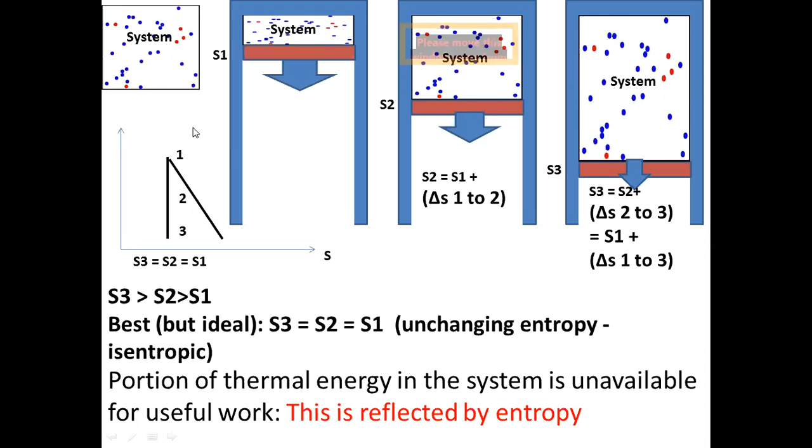That is more natural, yeah, that is more natural. And I'm going to continue this with one example, because with an example we can understand this better.

Also, before going for the example, let's look into this kind of thing, let's say work isentropic, and when you have work actual - work isentropic is more because you are not generating or increasing the level of entropy. So W isentropic is ideal, so it delivers work. Here, that ideal work is more than the actual work.

That's why, when you take the ratio of W isentropic to W actual, or W actual to W isentropic - if you take the ratio, we call this isentropic efficiency.

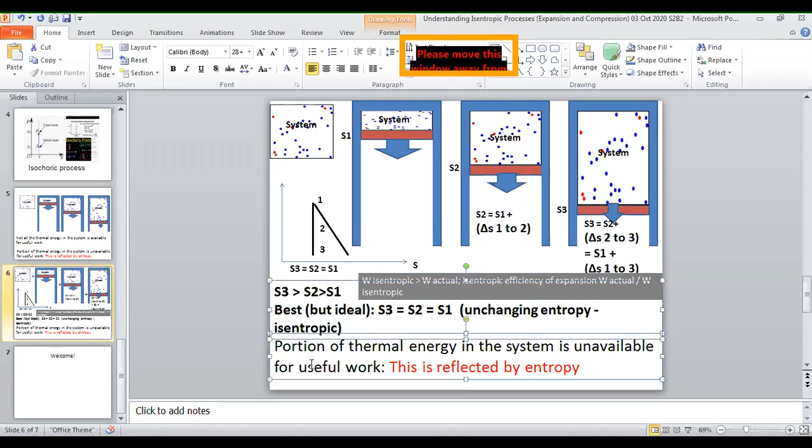A similar one we can take for compression. That is isentropic compression - imagine air compression or refrigerant compression. So for compression, in actual you need more compression work, and in ideal isentropic you need less compression work. This is common sense, yeah.

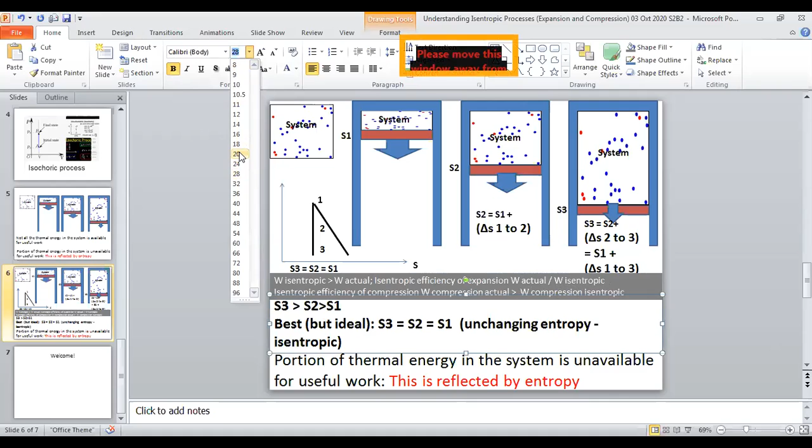So W compression actual is more than W compression isentropic. That's why, again for compression, we have an isentropic efficiency expression - isentropic efficiency of compression, where in this case W actual is... let me take W isentropic first.

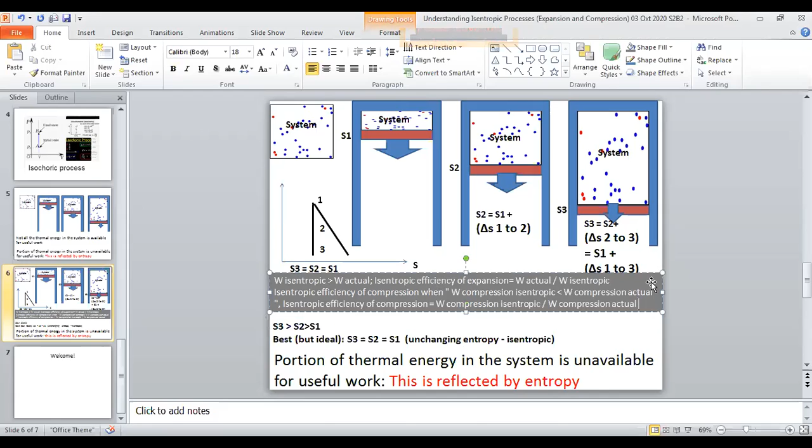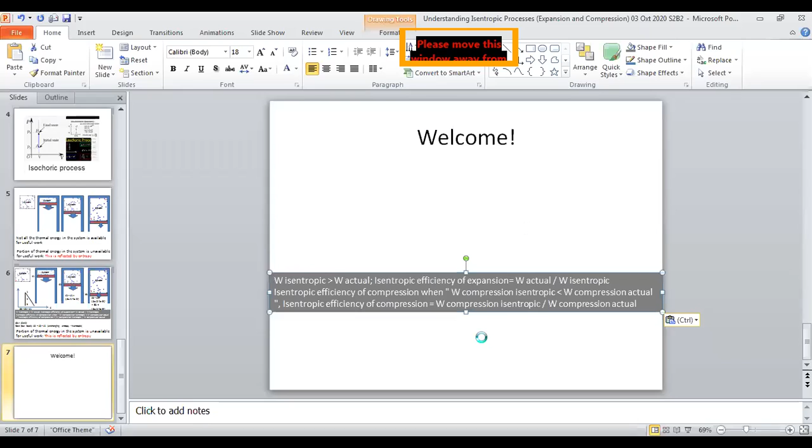So this one, I will take this way. Later I'm going to email you this, that's why. So this is about compression.

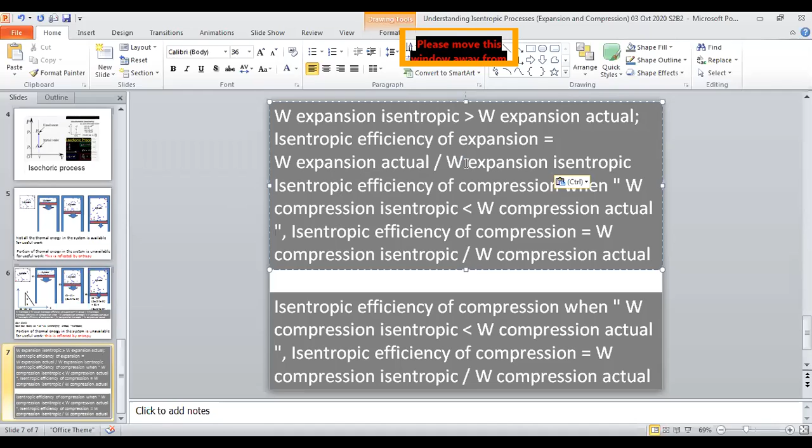Interesting. So W expansion isentropic. Expansion means work done—even in the engine, the gas expands and work is done. So W expansion isentropic, that is really the work delivered by the system, is greater than W expansion actual. So isentropic efficiency of expansion is this W expansion actual divided by W expansion isentropic. So the best is isentropic expansion compared to actual expansion.

Okay, good. So for these things we need some common sense. So you know what isentropic efficiency means: for expansion it means work done, work done by the system. So compression means work done on the system.

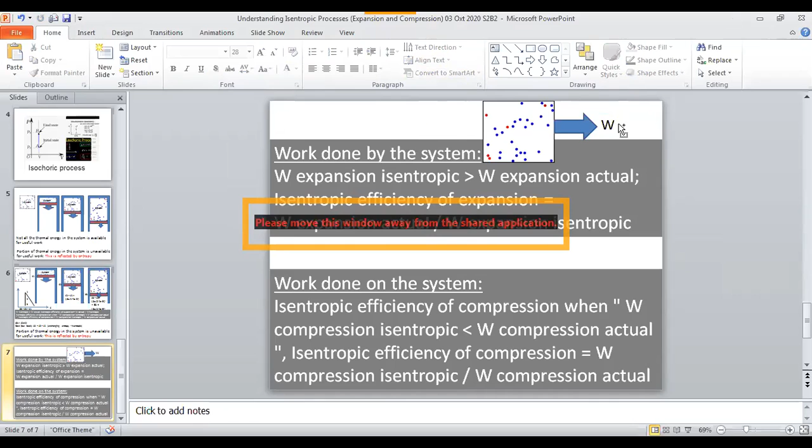Again, let me know if you are not hearing. So this is W. In the compression mode, it's the other way—work done, W, on the system.

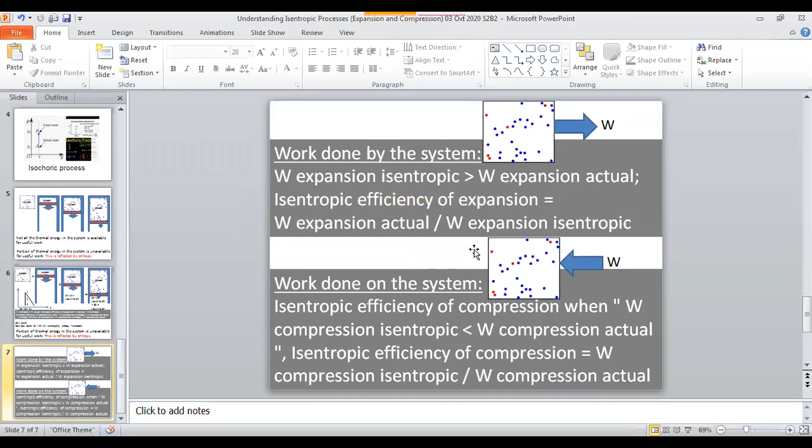Interesting. Yes. So when there is work done by the system, there should be expansion. Work done on the system, compression means part of the system boundary is moving inward and the gas gets compressed. In expansion, the system boundary moves outward because the gas expands, and work is done from the system or by the system. That's how it is, and this work is what we call mechanical work done because of this expansion and compression.

Quite interesting. So you know isentropic efficiency for compression and isentropic efficiency for expansion. You have some basic idea of what isentropic means—it means you are not letting the unavailable portion of thermal energy for useful work increase. So not letting it increase means you are getting the best work done out of the system. That's why it's an ideal case. So you always compare it to the real case.

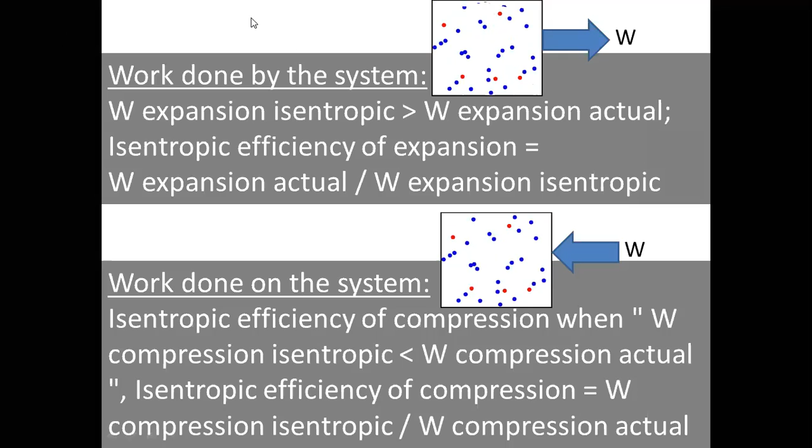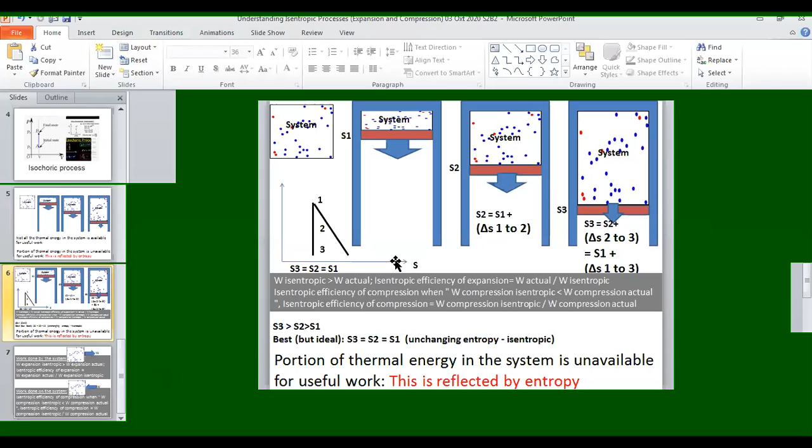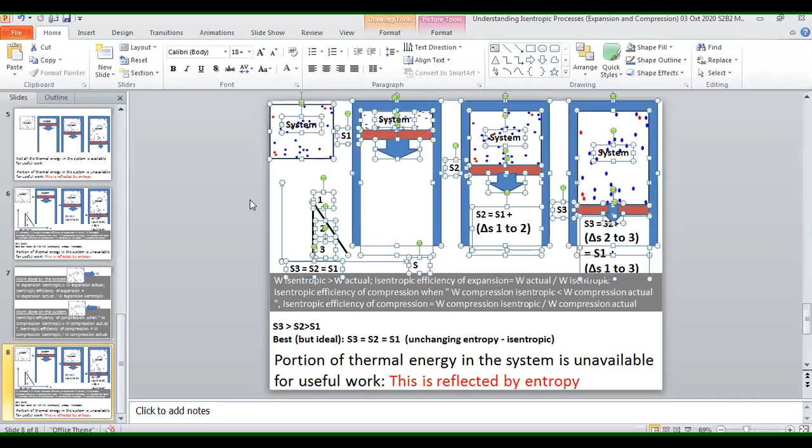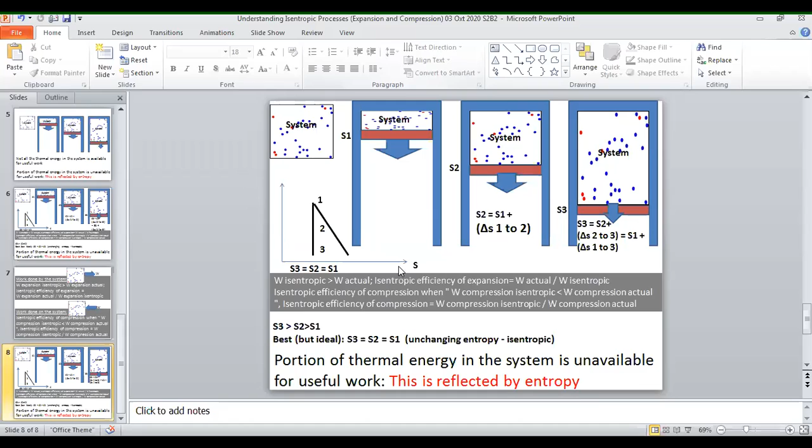Okay good. Then I have to bring the previous slide back. See what I'm going to do—I want to maintain this as a photographic memory for you.

Yes, it is here. But don't expect animations anymore. Yes, this one. So...

I'm writing an expression for efficiency, eta isentropic, work done—eta isen, let's say expansion. So when expansion is there, of course you have 1, 2, and 3 here. But now in actual, 2 is here. Ideally, you have 2 here. In actual, your 3 is here, and ideally, you have 3 here. I hope you can understand this.

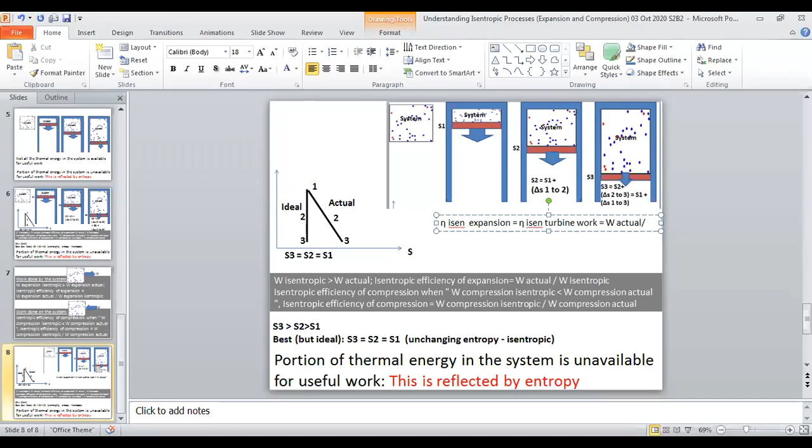Okay, let's say this is isentropic expansion. Let's say this is expansion—let's say this is turbine work. When it comes to turbine work, W actual divided by W isentropic.

That is equal to—for the turbines I will explain later—this is H1 minus H2 actual, divided by H1 minus H2 ideal.

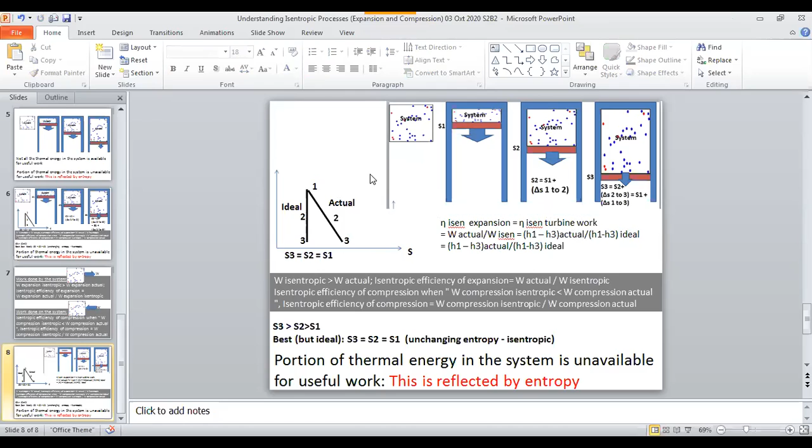So I will rewrite it again. How do I rewrite this? Sorry, H1 minus H3—this is the final, it's 3, not 2. But H1 minus H2 is also okay when it comes to the ratio. H1 minus H3, H1 minus H3 ideal.

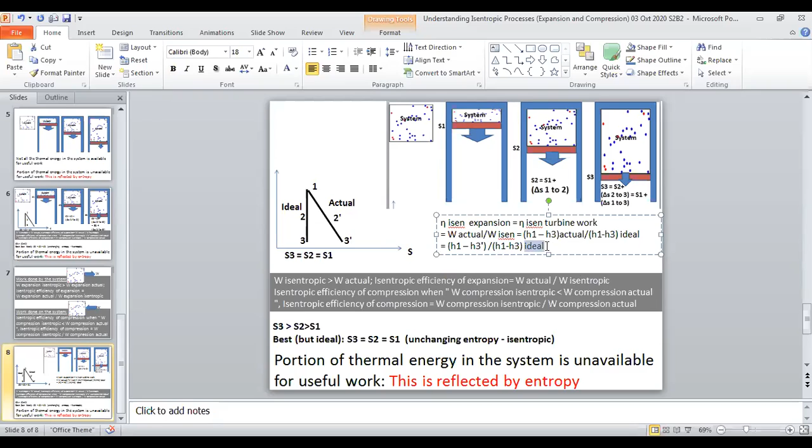So instead of 2, I put 2 dash, I put 3 dash. So this is H1 minus H3 dash actual, divided by H1 minus H3 ideal. So now for actual, you don't need the word actual, and here you don't need the word ideal. Some nice expressions for turbines. Interesting.

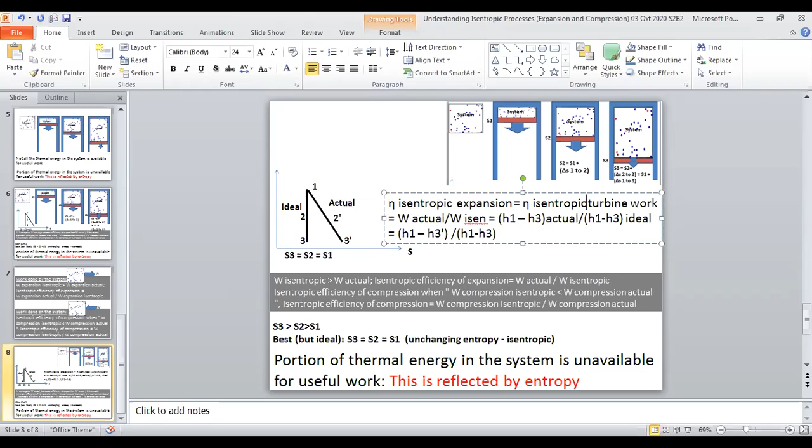Good. Okay, let's say this is isentropic. So why not I complete it as isentropic? Isentropic. Okay, very good.

Same way, when it comes to compression, okay, when it comes to compression, so I take a duplicate of this, I take this out. Compression. Isentropic compression. So this should be compressor work. Okay, compressor work. Actually, isentropic work on compression. Work on compression.

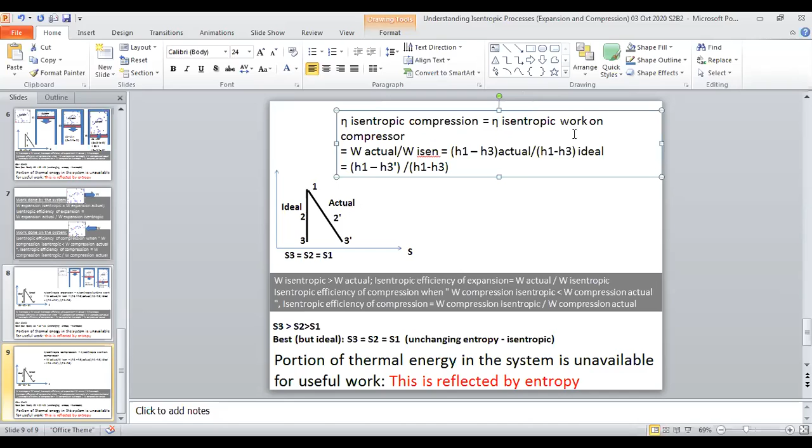Interesting. So that is, so actually smooth. Isentropic is less. That is based on our practical sense or the thermodynamic sense of knowledge. So H1 minus H3 ideal is here. Ideal means isentropic. H1 minus H3 actual is here. So H1 minus H3 divided by H1 minus H3 dash.

Quite interesting. Okay, and if I need to draw a compressor here, I can draw it. Yeah, okay. Gas flow comes, reduces and goes out. So your input, in, okay, in, output, you can put it here, out.

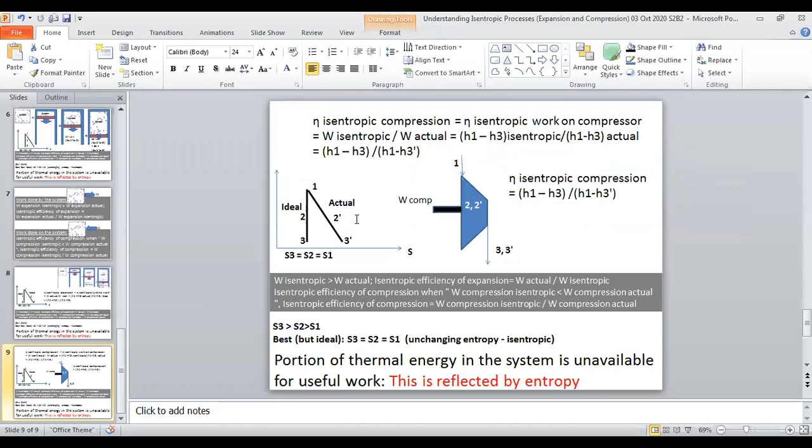Compression. W compression. Quite interesting. Okay, quite interesting. So this is for compression. Really neat. Simplified one. You can have it here. I believe you can understand this. Okay. This is for compression. Okay, good.

Sorry, that can be done. So that's how it is. So you have basically isentropic efficiency now. And this H values, how these H values are possible here, we are going to discuss afterward. Yeah, we are going to discuss afterward. These are the open systems, open thermodynamic systems. That one we are going to address later. So let's say I'm going to put a question for you, a question for you to understand this.

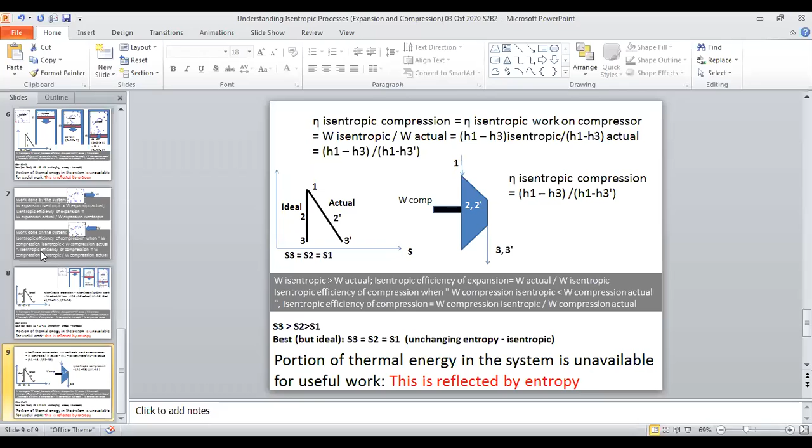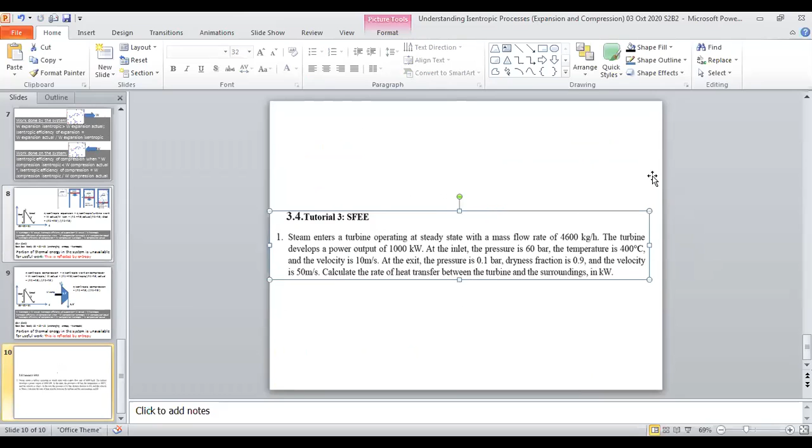This is the 3.4 tutorial 3 about steady flow energy equation. This is the question. Okay, this is the question. So we have to, I'm going to modify this. Okay, I'm going to modify this before we are working on this. Yeah, let me do the modified one. Right? Let me do the modified one.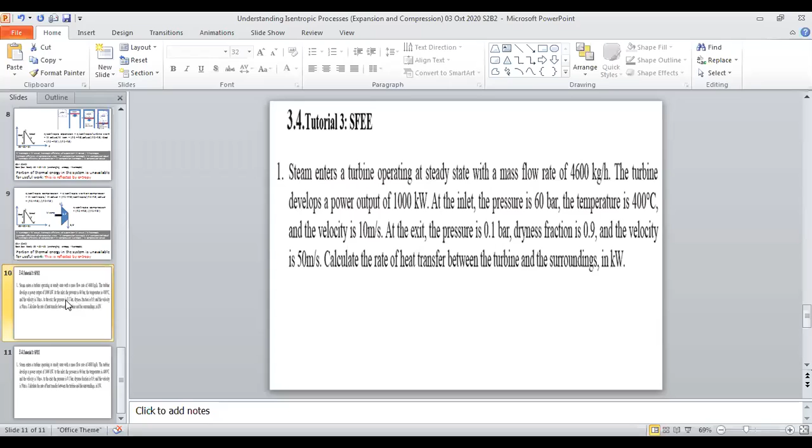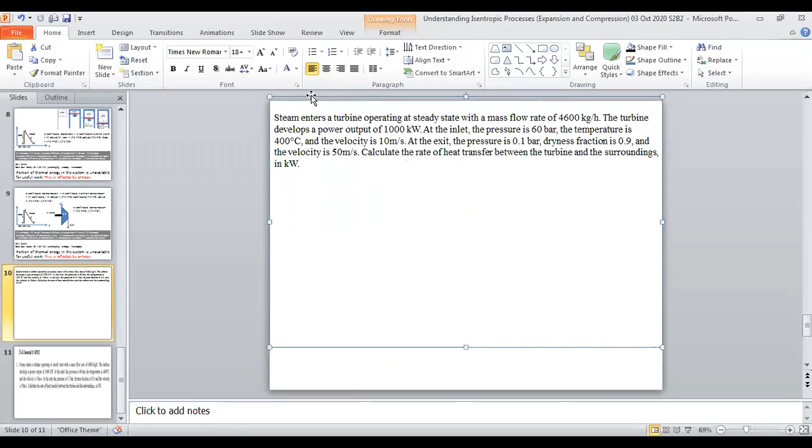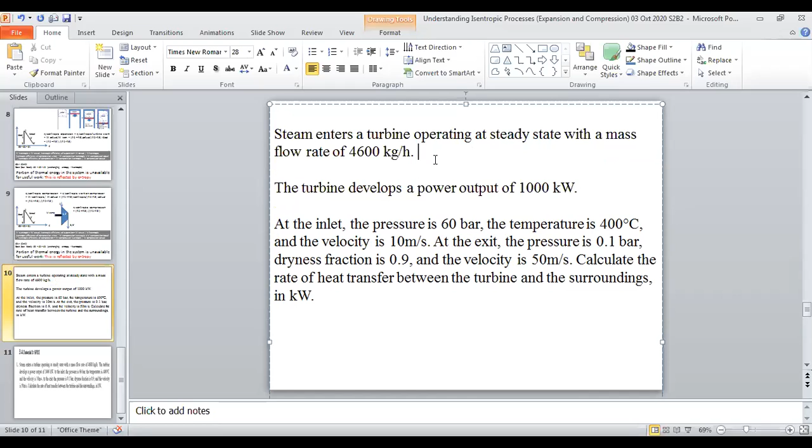Before doing this, let me modify this. This is in your notes. Huh? It's in your notes. I take this out. This is the new addition.

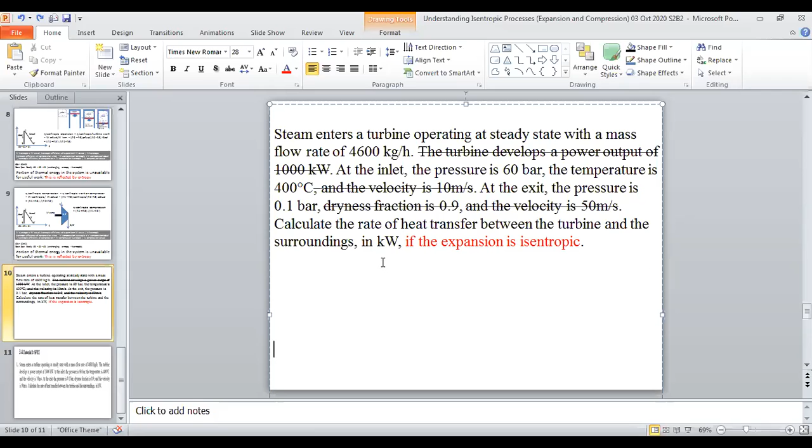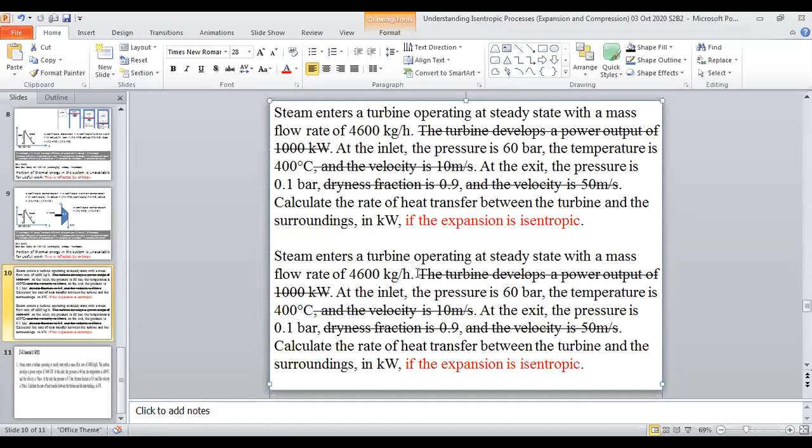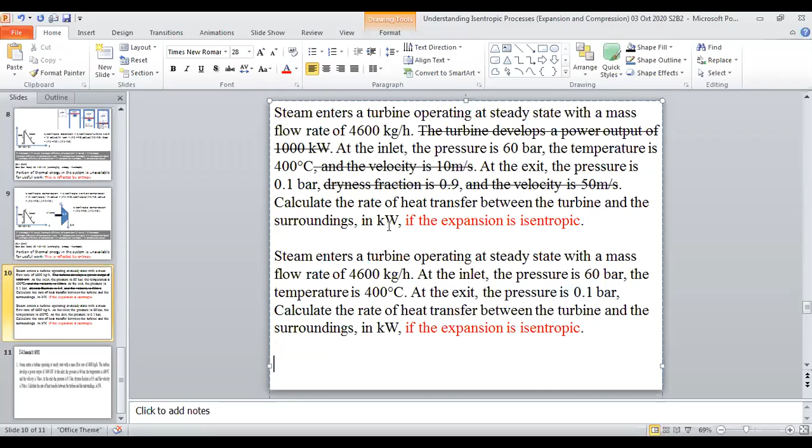I take this also out. I take this also out. Oh, it's okay. So this is the question. Later we can make these letters big. Yes, so we will work on this. And this is the question. Now this is the question. So

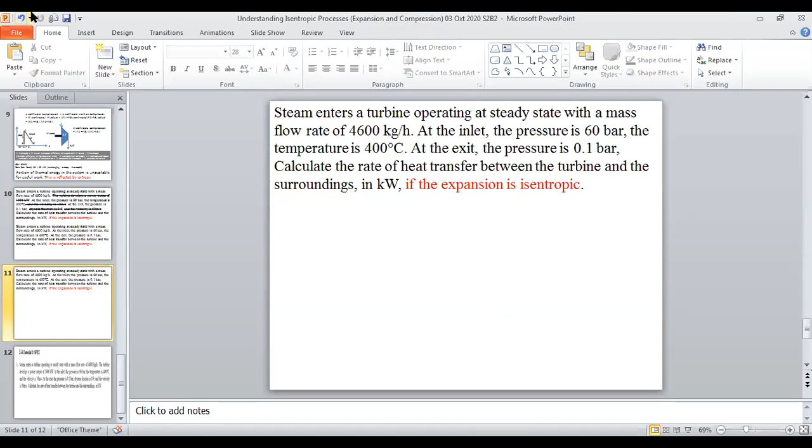Good. So you're asked to do this. You're asked to do this. I don't know how can you manage this? Can you outline this? Okay, can you manage or can you outline this?

I put if the expansion is isentropic, which means the steam - see, imagine the inlet pressure is 60 bar, quite high pressure, very high temperature. So then at the exit, the pressure is very low, 0.1 bar, meaning this high pressure steam expands when this steam passes through the turbine. That's how it is. Okay, when the high pressure, high temperature energized steam expands, meaning when it delivers the work, okay, the energy level of the steam reduces and finally becomes almost very little amount of energy. That's why you can see pressure is very low. Okay, and also there may be some wetness, meaning some steam almost converted to water. Water means the steam molecules very silent and joined together and then become like water.

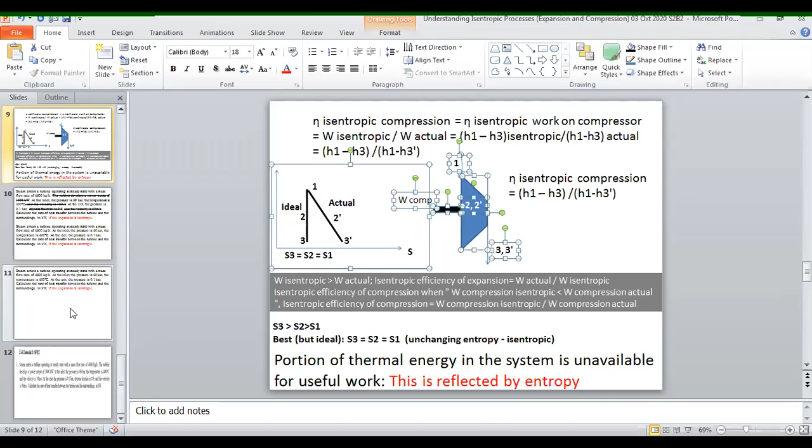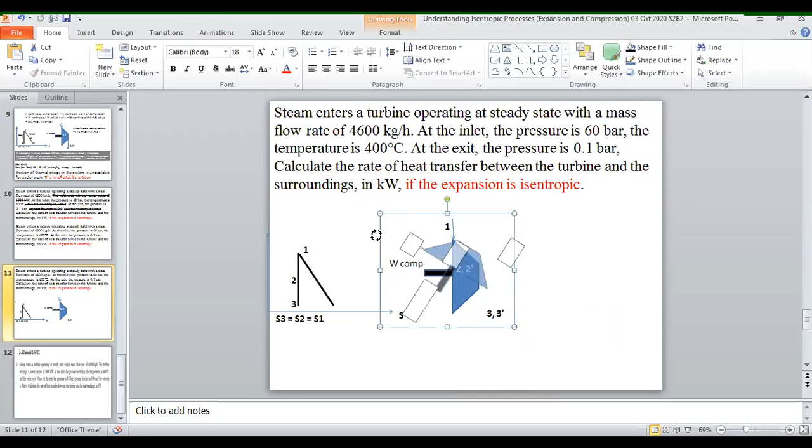Now what happens is this is a turbine. Turbine means it's an expansion, not like this. Okay, it's an expansion. So expansion. In an expansion, so it is something like the volume increases. Okay, and the work is done by the compression - sorry, by the turbine. W turbine. W turbine. Okay, work is done. Good, W turbine, it is like this. Okay.

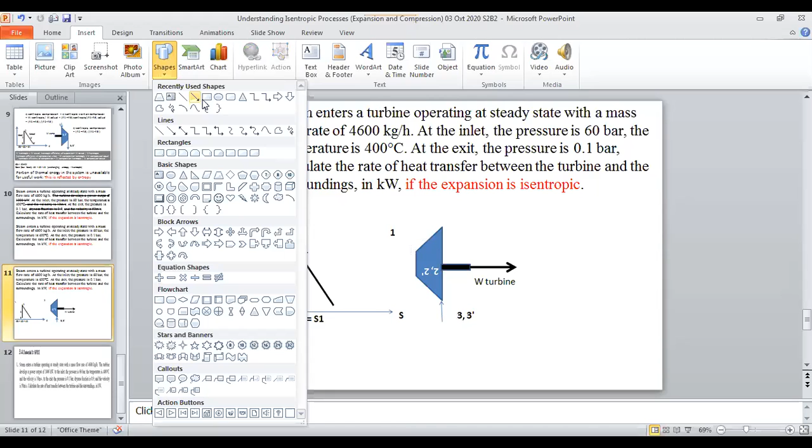So leaving steam is somewhere here. Entering is somewhere here. Okay, entering is somewhere here. So let me add the inlet like this. Okay, so you have the inlet and you have the leaving. See, inlet and leaving, outlet. Yes, you're in and out. 3 is here. So, and the middle it is 2. In the middle, 2 and 2 dash. Okay, 2 and 2 dash is in the middle. Sorry, 2 dash and 3 dash.

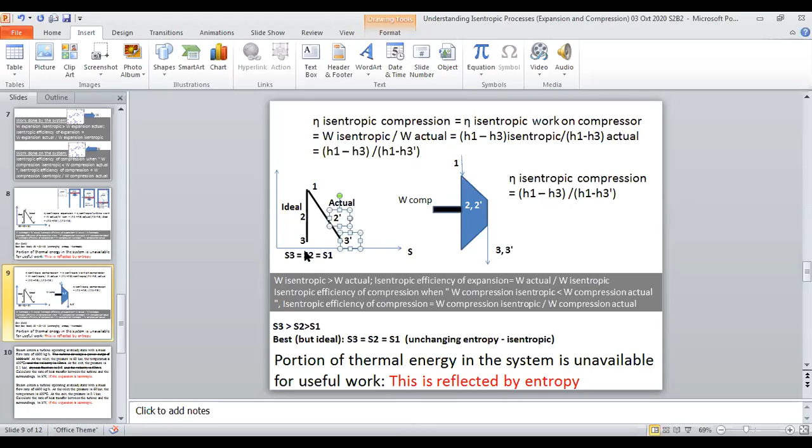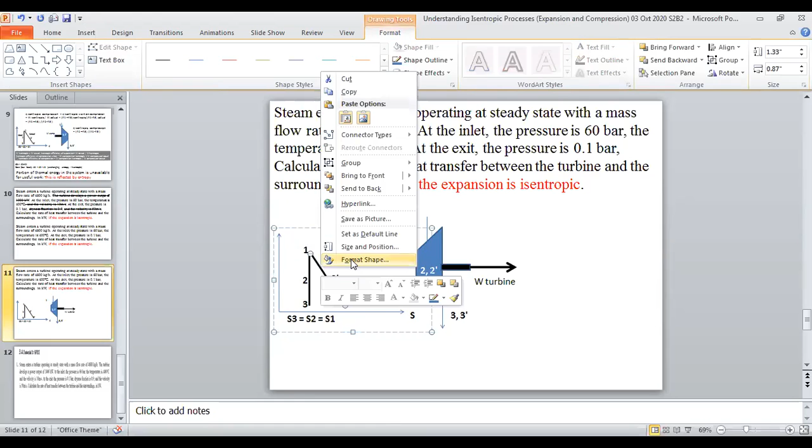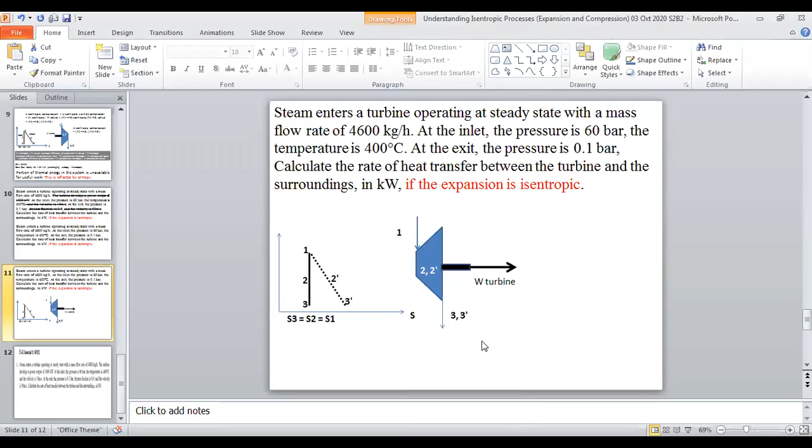Yes. So our path here is isentropic, meaning we follow 1, 2, 3. Okay, we follow 1, 2, 3. S1 equals S2 equals S3. This is our path, 1, 2, 3. Not this. So our path is 1, 2, 3. Yeah, good. Yeah, something like that.